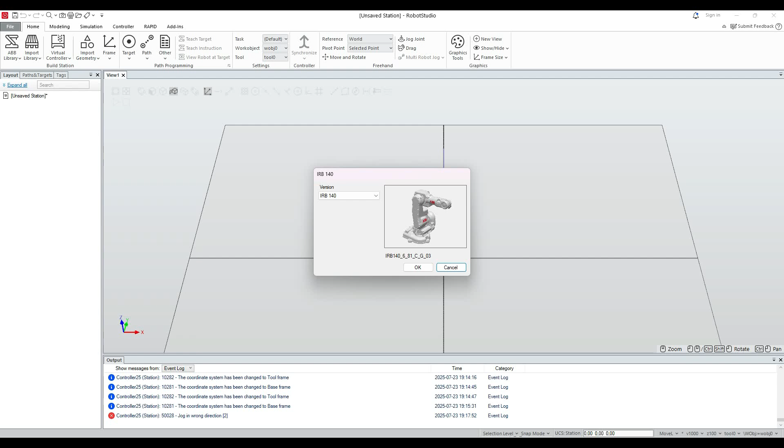So let's start. I'm going to select IRB 140, then controller.

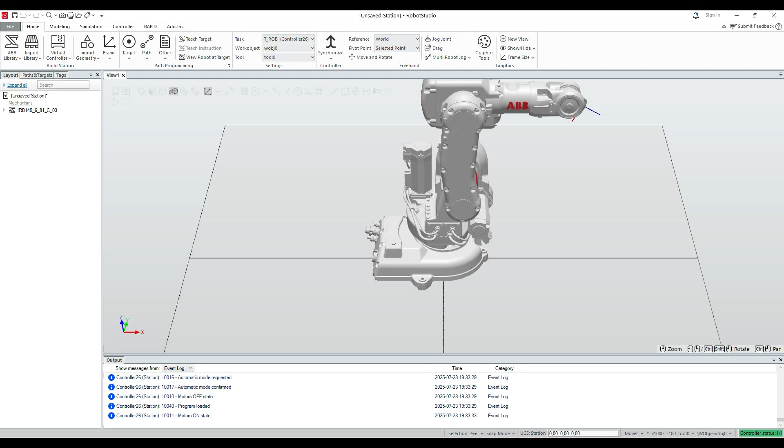I will suggest you guys to practice this. Try to do anything, just practice, just play with these things. It will be easier for you to work with it later. How much you play, you will understand that much, and that many problems will come, and when you solve a lot of problems, you will learn more. So try to practice as much as you can.

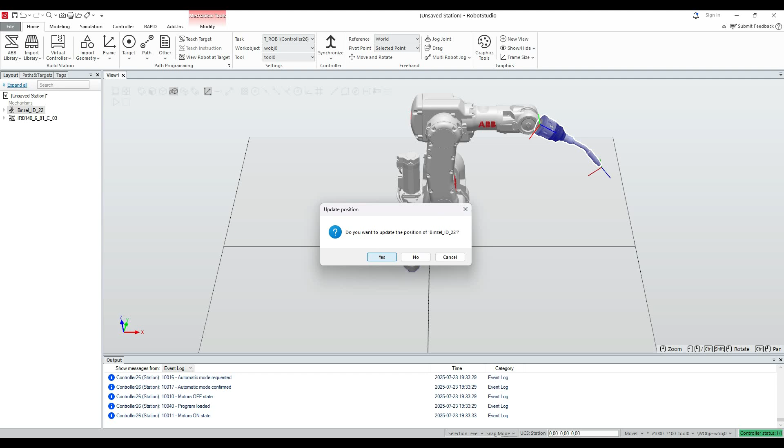Then I will choose this one, and I'll mount it with the robot. So now I have everything.

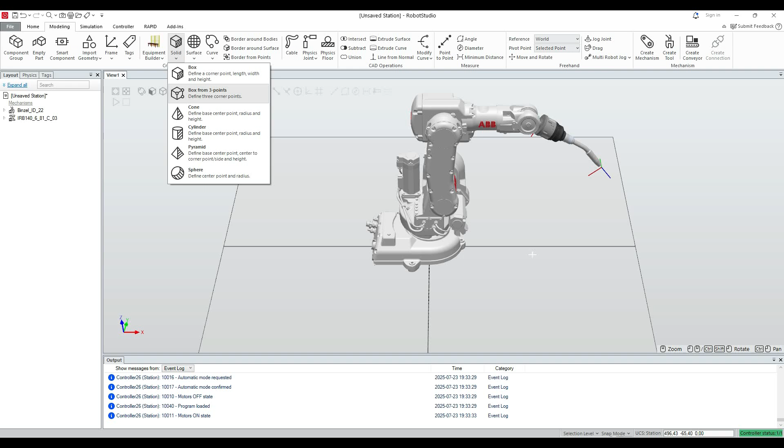Now whenever you want to measure the TCP or tool center point, you need to have something as a reference, something pointy. So either you can make a CAD model yourself, or you can also use this. If you go to the modeling tab, you have cone here. You can put diameter 100, and I think 300 will be enough.

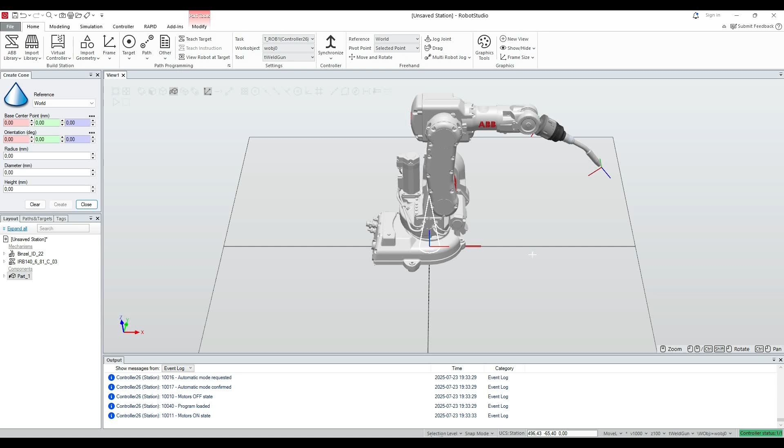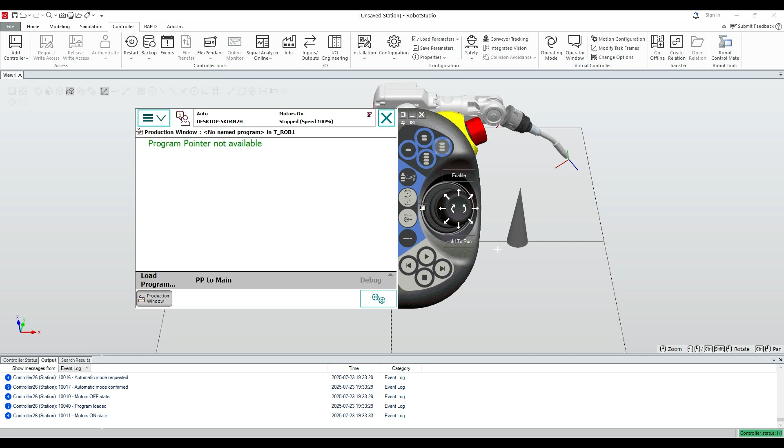Okay, so just let me bring it here. Now, we will use the flex pendant here, since when you work with a real robot, you will definitely use the flex pendant to take data for TCP or work object area. So I will show you from the flex pendant. I think I can keep it here, it's better to put it here.

So first we have to go to the program editor, and we will go to the jogging. We will select tool. Okay, we have to enable it. Motor on. We'll go to tool, new. We'll put this toolGun.

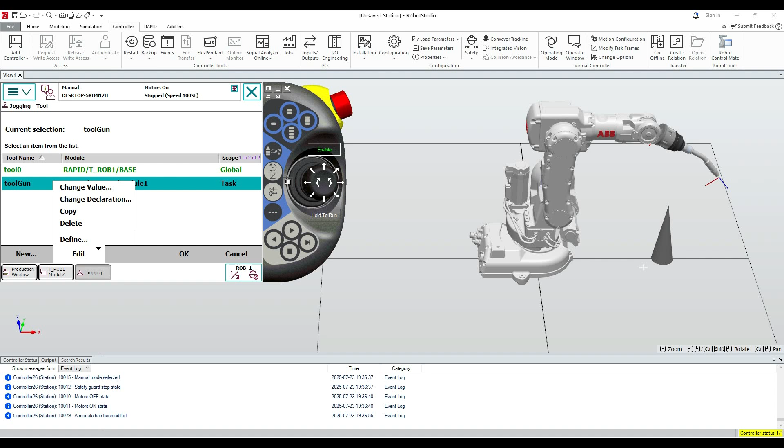Okay, then on the tool, you have to change the mass, which will be written on the tool gun also, otherwise it will not work. Normally on the gun you will have written how much weight it has and everything. I think we can talk about these things later.

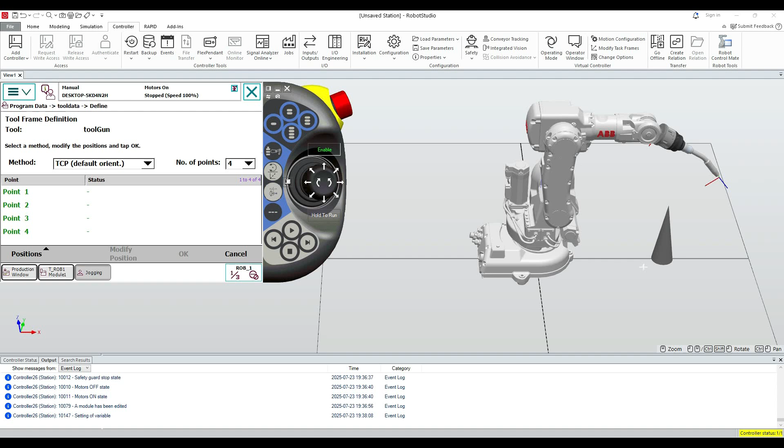So we will use the method of 4 points. Basically, with this tool gun, we will try to touch the sharpest point here, and after that we will take one value like this, this, this, and this way.

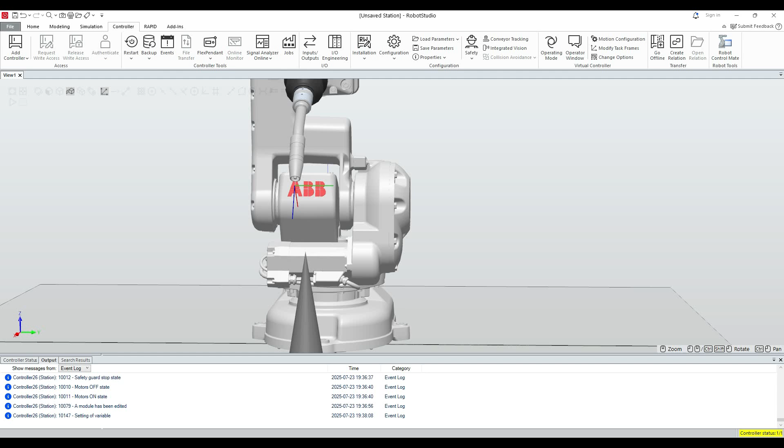There are two more ways, TCP and Z, or it's called 5 point or 6 point. Those are used in different cases that we will talk about later when it's the right time. Right now we will only focus on 4 point.

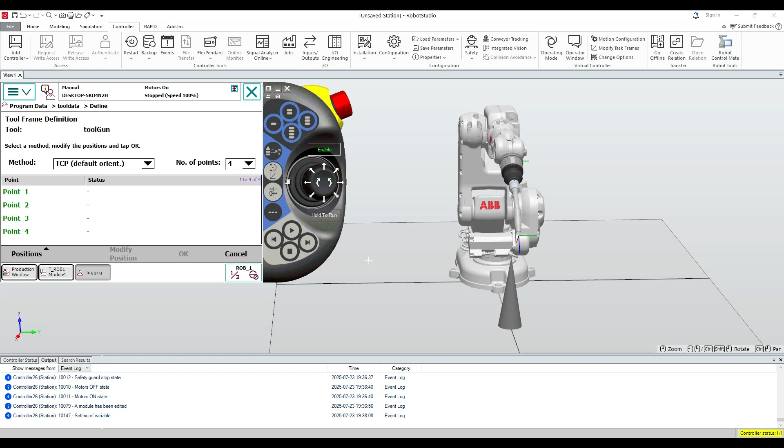So first we have to come to the straight point with this controller. In simulation software it is very tough to do this, but in real life, trust me, it's 1,000 times easier. I have done it myself and I can assure you it's super easy when you do it in real life with the real robot.

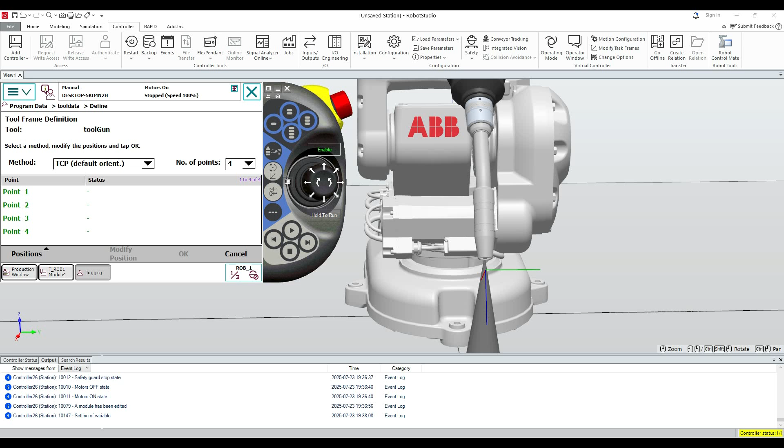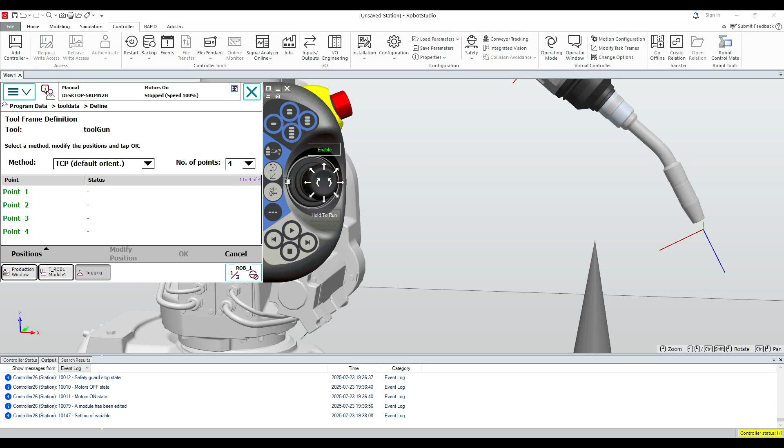It's super easy, but in simulation software it's quite tough to do this. Basically with this controller you have to fix it, but I will show you another way. This is like cutting the corner, for practice purposes, but normally if you work with a real robot you have to fix it with this, come to this point and fix it.

And I know it's quite tough in software, but trust me, in real life it's super easy. Our main intention is to learn how it works, but in real life you obviously have to follow the way, otherwise it will not work.

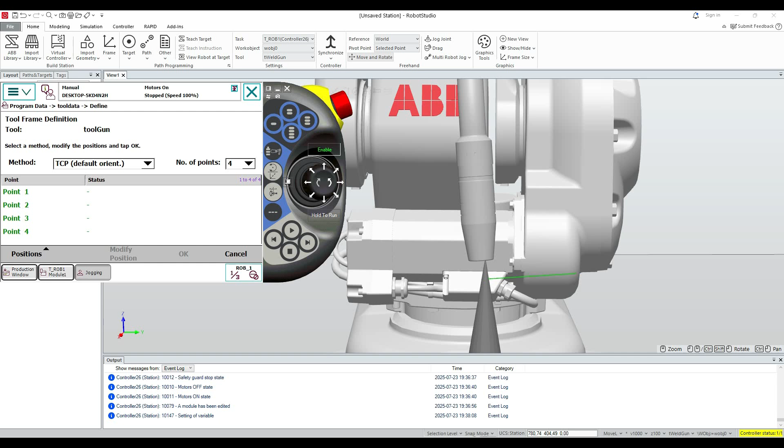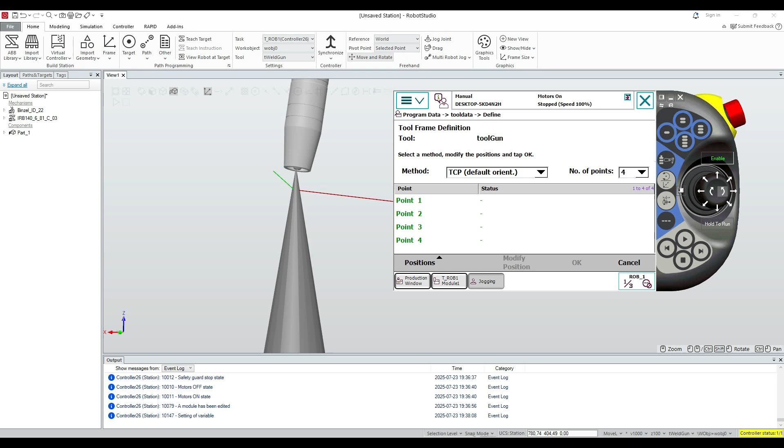If you notice, it has already touched the cone. See it better, yeah it has. It will be better the more to the middle point you can go. So this will be my first point, modify position.

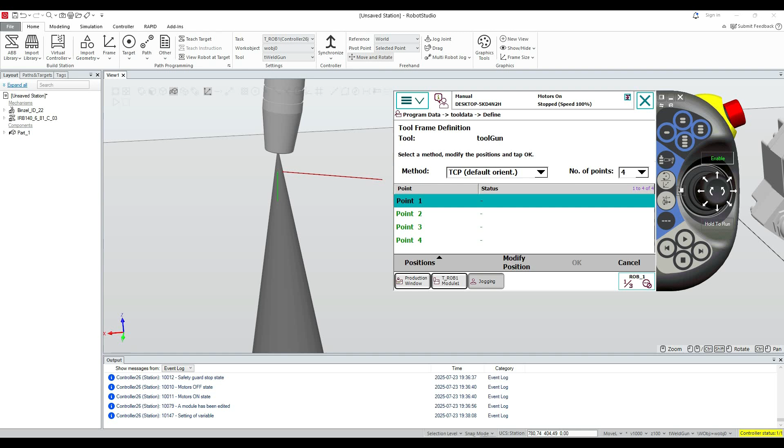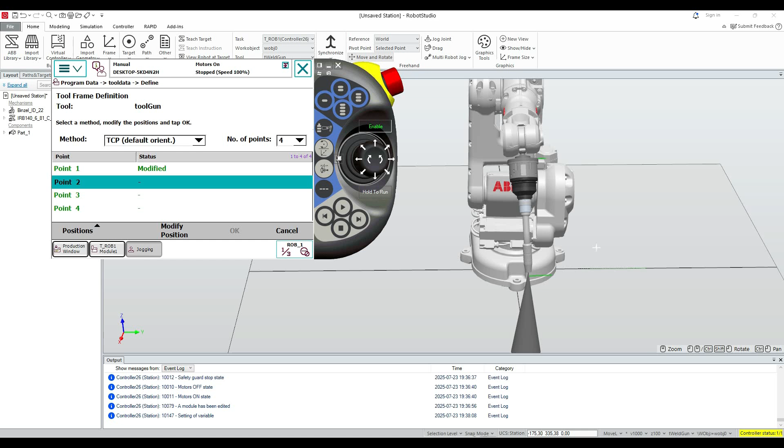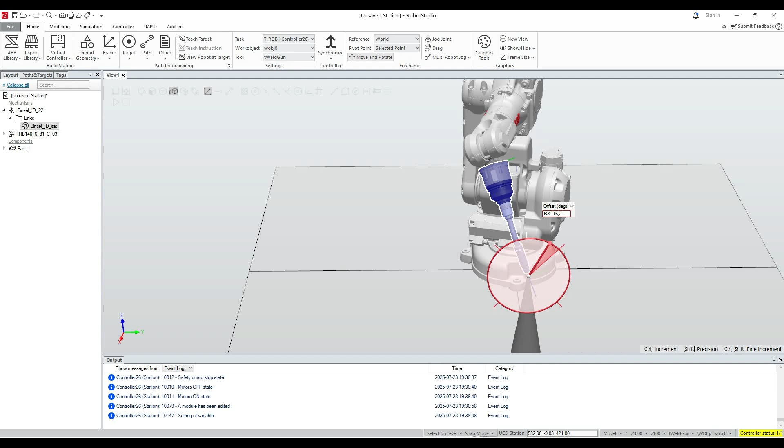Now I will cut some corner so it becomes a little easier for me. But normally if you do it in real time, in real robots, you have to fix it with this controller again. Since I'm working with simulation software, I will cut some corner. I'm going to select this and use move and rotate and jog joint, turn it like this. When you work with the controller, you also need to turn like this, then go away from the point, and come back to the point.

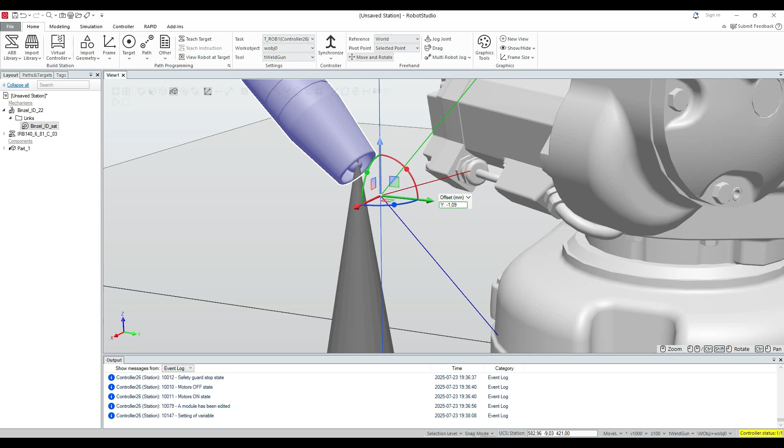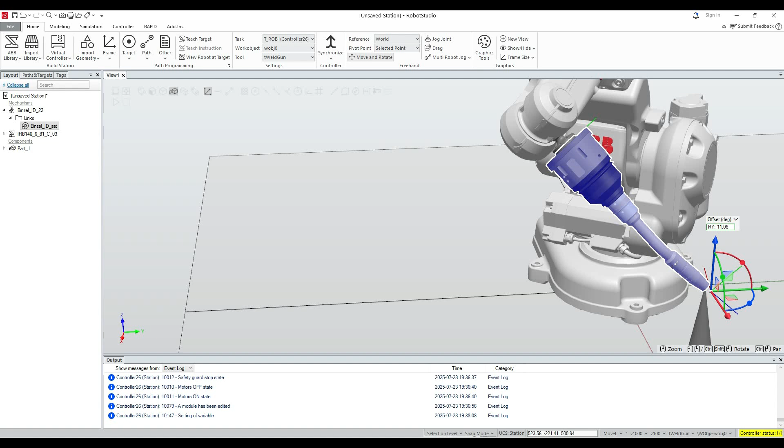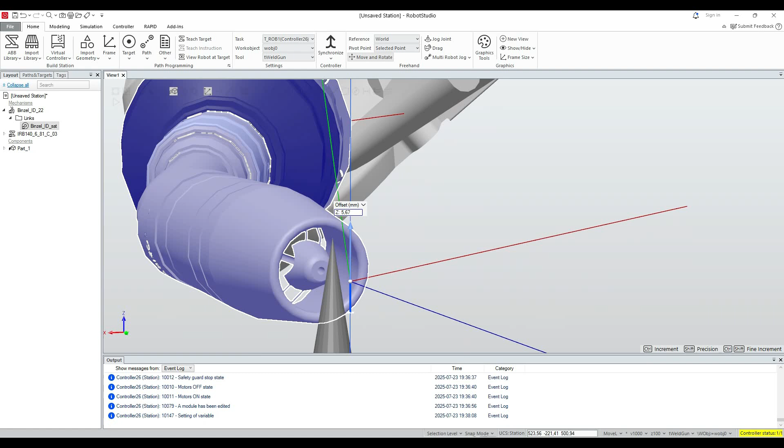So this will be my second point. I can select this. I want to make it a little bit forward, otherwise it will show me a problem with moving. In this angle again, go away, come back to the point. Yeah, should be fine. So this will be my third point.

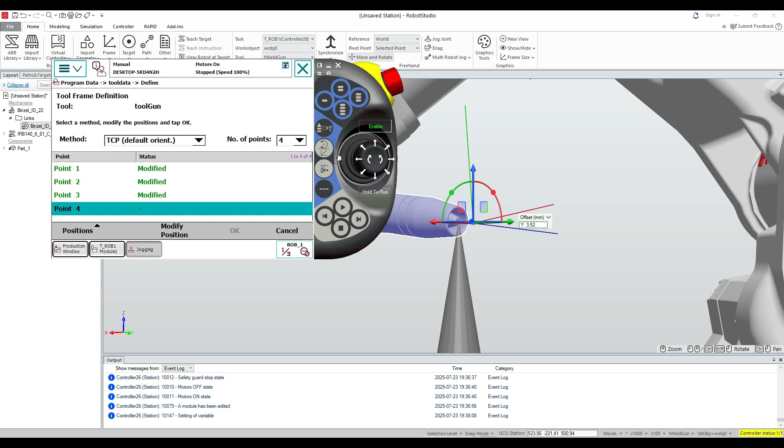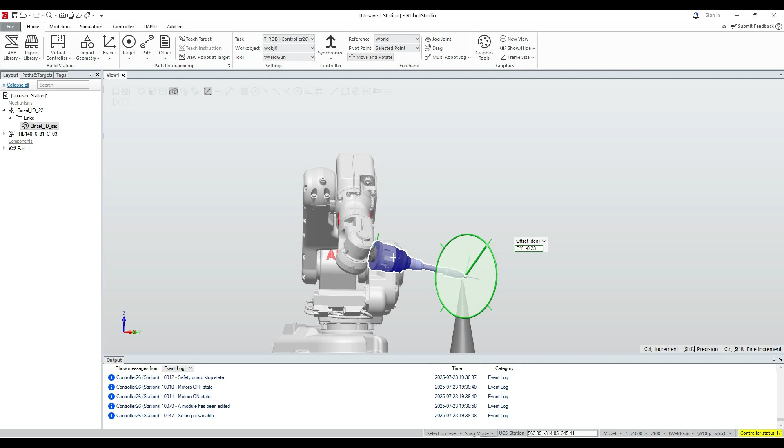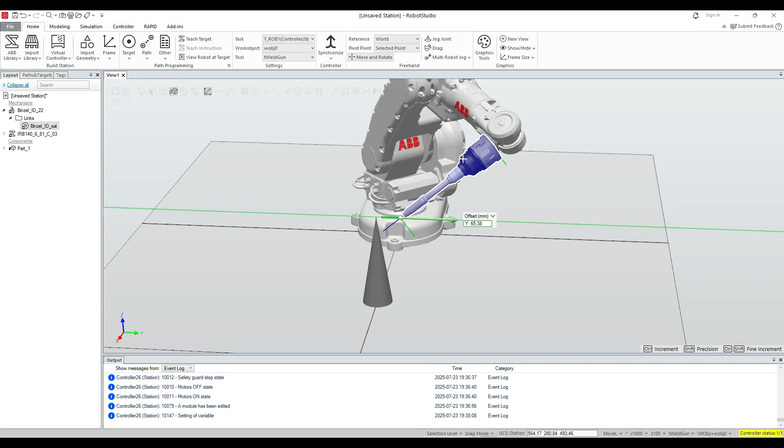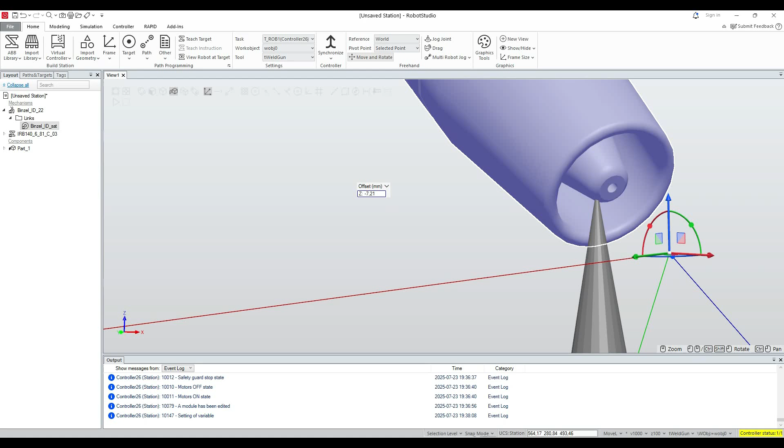Now again I select this and I will rotate into... no sorry, keep this angle. This will be enough. Then go away and come back. Perfect, so now this is my fourth point. Then I fix it, okay.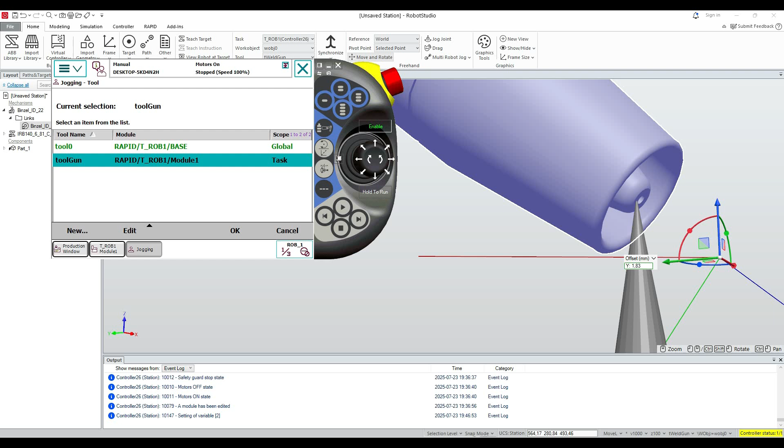So my TCP has been set, but now we have to check did I do it correctly or not, did the robot exactly find the tool center point. To examine if the TCP is correct or not, we have to select tool gun here, go to the motion mode, and select reorient. If the robot moves around the point, then we have done a good job. Let's check. So if you look, it's moving around that point.

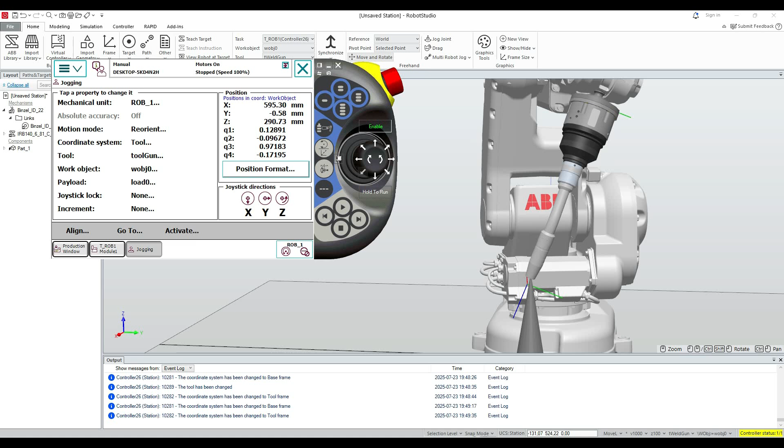So I think we can conclude that we have done a good job. We have successfully found the TCP.

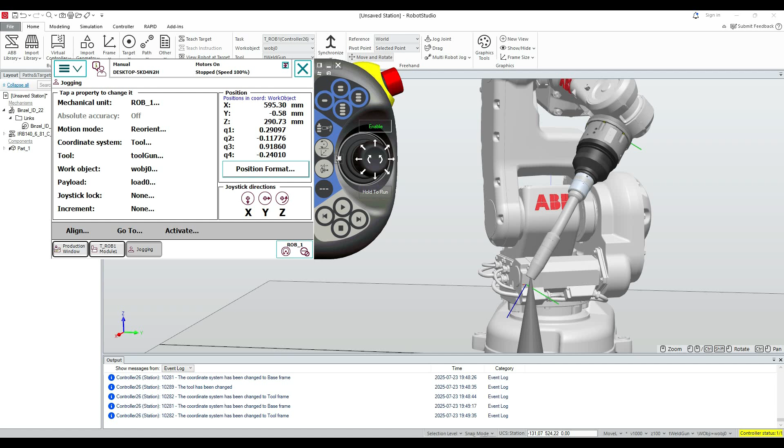So that's how it works. Whenever you change a new tool, keep it in mind that you have to do this process again. Every time you change a new tool, you have to find the TCP. Even if you make the tool bigger or smaller, you also need to fix the TCP. One more important thing, if you don't save it, you will lose the data. So if you work later, you have to fix this TCP point again. So I will save it so we can practice with this later.